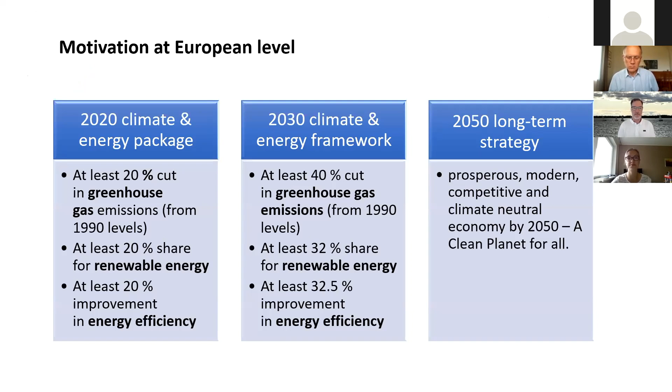The European Commission has set targets for the European Union to reduce greenhouse gas emissions, promote renewable energy sources, and increase energy efficiency. Lithuania has a national energy independence strategy where the desired results in the Lithuanian energy sector are stated. For example, one of them is to increase the share of electricity consumed from renewable energy sources compared to final electricity consumption to 30% by 2020, 45% by 2030, and 100% by 2050.

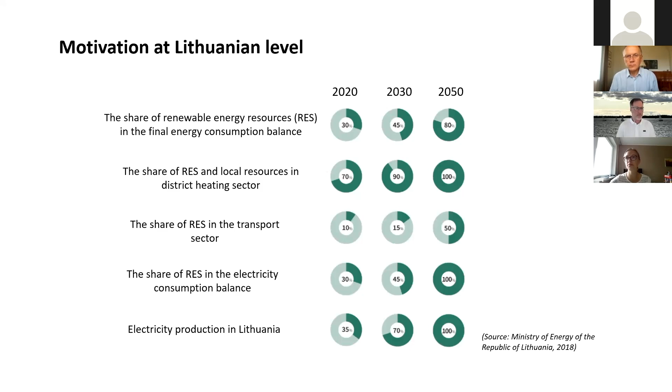Electrification of city transport and the use of renewable energy sources in the transport system have become leading trends for sustainable transportation. And passenger cars are one of the main contributors to climate change, air pollution and noise in the cities. My interests are measuring the impacts on the environment through a life cycle perspective. Therefore, for my analysis, I selected different engine passenger cars.

And here are the aims of the study. To evaluate and compare the environmental impacts and economic cost of battery electric vehicle, hybrid electric vehicle, and internal combustion engine vehicles powered with diesel and petrol, to analyze the electric cars' operation stage under different electricity generation scenarios that are forecasted for the years 2015-2050 in the Lithuanian context, and to assess the most environmentally and economically preferable electricity mix scenario and generation technologies under which the environmental load and economic cost would be the least.

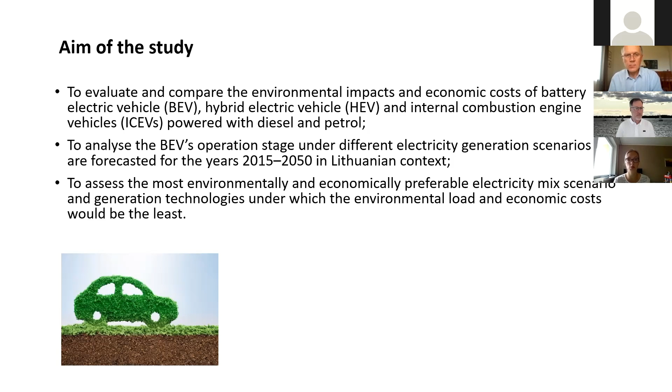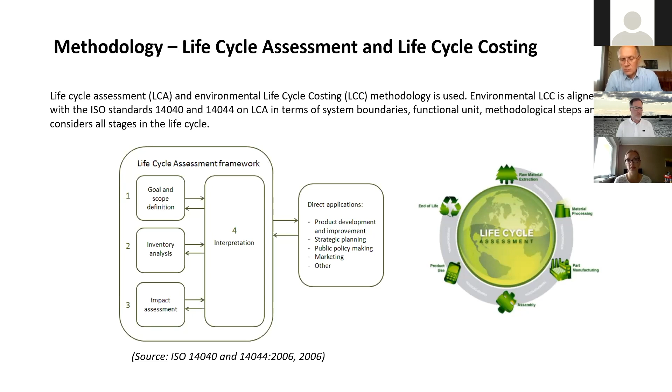Then methodology. Life cycle assessment and environmental life cycle costing methodologies were used. They are both aligned with the ISO standards on LCA in terms of system boundaries, functional unit, methodological steps, and consider all stages in the life cycle. In accordance with the standards, the analyses were performed in the following main steps: definition of the goal and scope of the study, identification of functional unit and system boundaries, life cycle inventory analysis, and life cycle impact assessment and interpretation.

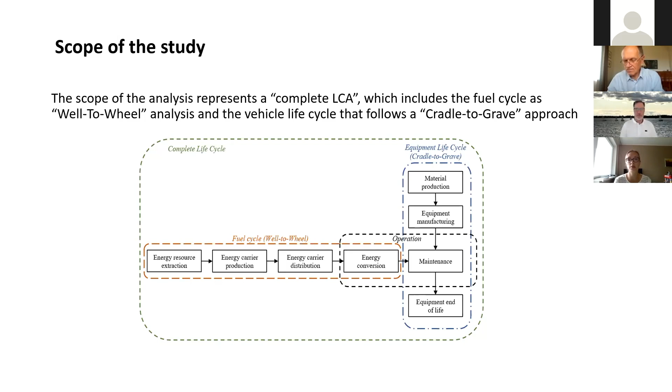Scope of the study. The scope of the analysis represents a complete life cycle assessment, which includes the fuel cycle as well-to-wheel analysis and the vehicle cycle that follows a cradle-to-grave approach. A fuel cycle combines stages from energy resource extraction until energy conversion, and the equipment life cycle combines stages from material production until equipment end of life.

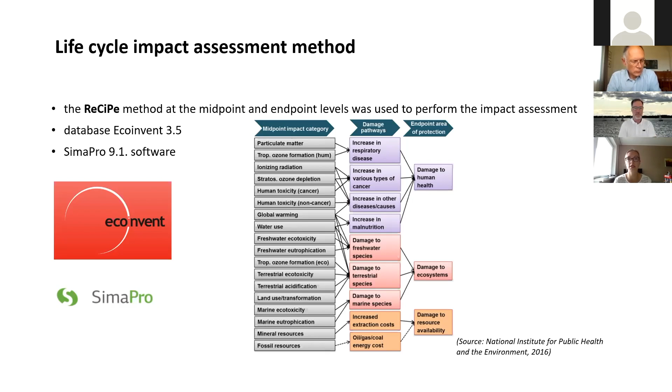Now I will present the life cycle impact assessment method. The ReCiPe method at the midpoint and endpoint levels was used to perform the impact assessment. For this analysis, the Ecoinvent 3.5 database and SimaPro 9.1 software were used. The ReCiPe method at the midpoint level shows the results in 18 impact categories, while the endpoint level combines these impact categories into 3 damage assessment areas: damage to human health, ecosystems, and resources.

Inventory analysis. This research aims to reveal the real situation in Lithuania, so the passenger car models have to match the most popular models registered in the market. According to the statistical data of Lithuania, the most popular electric car is the Nissan Leaf, hybrid electric car the Toyota Prius, and diesel and petrol cars are the Volkswagen Golf. These passenger car models belong to the medium-sized class and are similar in weight and length. Therefore, they are suitable for a comparative life cycle analysis.

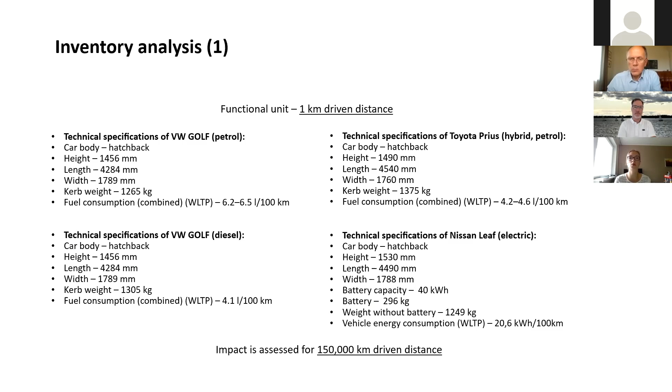A functional unit of 1 kilometer driving distance is determined and the impact is assessed for 150,000 kilometers driven distance. Environmental impacts are calculated for such a life cycle, ensuring that no electric car battery replacement is required. For the battery electric car, it is very important to know how electricity for charging the battery is produced. For this reason, the impact of the battery electric car is calculated under different electricity mixes and electricity production technologies.

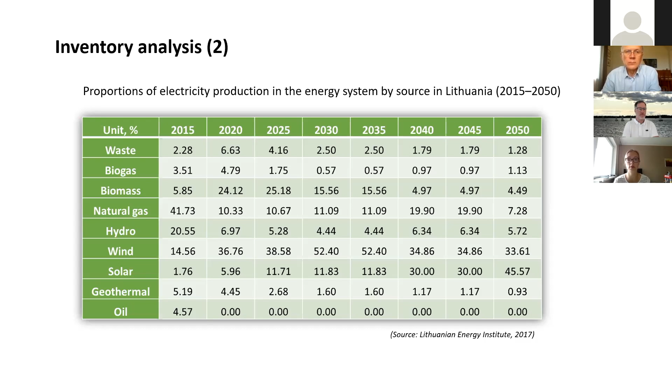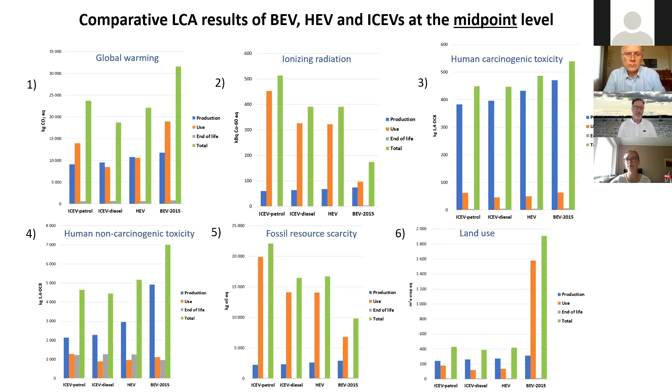This graph shows the results of well-to-wheel analysis of the same passenger cars at the midpoint level. Impact on the environment for the battery electric car depends on electricity production mix. Therefore, here I present well-to-wheel analysis showing the impact from energy resource extraction until operation under different electricity production scenarios.

For example, in the year of 2015, due to the use of oil and the biggest share of natural gas, this electricity mix was the most polluting. Year of 2030 is expected to be one of the most environmentally friendly, as 4 of 6 impact categories here are the least due to the use of biomass and wind energy as main sources. Moreover, solar and wind energy will be actively used as the main sources in the scenario of 2050. Therefore, this scenario is one of the desirable, as in all impact categories it is among the lowest.

Results of global warming show that battery electric car with electricity mix of 2050 is about 60% less than a petrol car and 25% less than diesel car.

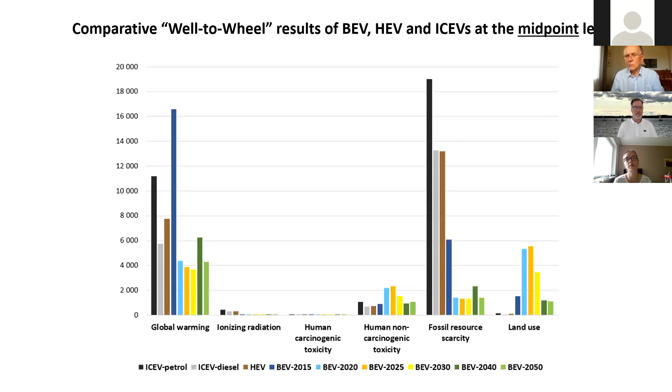The environmental life cycle assessment was also performed according to the ReCiPe method at the endpoint level. The results summarize the total environmental load as damage for resources, ecosystems, and human health. The results reveal that a petrol car has the highest environmental damage. Hybrid and electric car with electricity mix of 2015 have almost the same environmental damage, which is 14% less than petrol car. Next comes diesel car with 10% less impact than hybrid and battery electric cars. Furthermore, battery electric car with electricity mix scenarios from 2020 to 2050, which are composed mainly of renewable energy sources, have the least environmental damage.

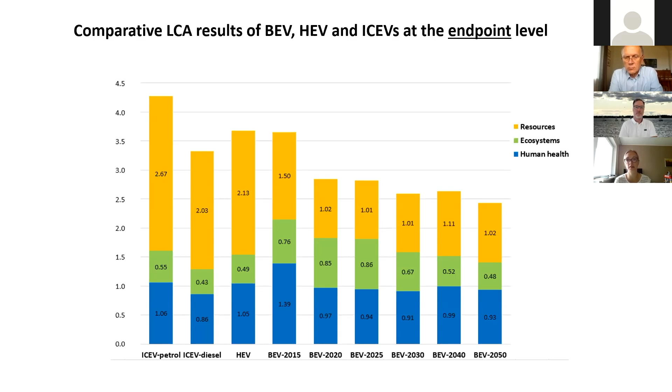Now I'd like to present the results of life cycle costing in order to assess the economic side throughout the whole life cycle: manufacturing, use, and end-of-life stages. The graph shows the results of a comparative life cycle cost analysis of the same passenger cars from consumer side under Lithuanian conditions. Manufacturing phase includes acquisition and registration tax. Operation phase includes maintenance and fuel price. End-of-life phase includes only the deregistration tax. A service of old cars, discard for treatment and recovery is free of charge, therefore it is eliminated.

The results show that hybrid and battery electric cars have the highest cost because of the high purchase prices, while internal combustion vehicles have the lowest ones. But comparing the operation stage, it is obvious that electric car has about 37% less cost than diesel car and 60% less than petrol car. It is assumed that electric car is charged at home at an average cost of electricity. But operation for the electric car owners can be even less because most of public charging stations are free of charge.

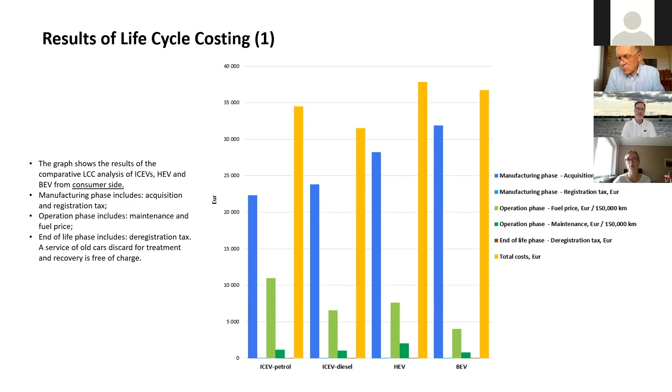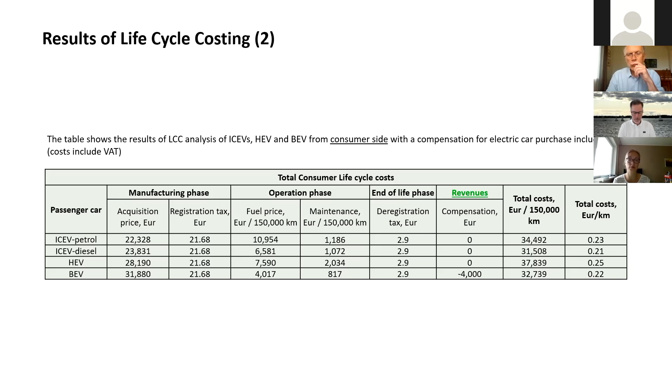This year, a financial incentive has been implemented in order to promote the purchase of electric passenger cars. There is a possibility to receive a compensation of 2,000 euros to purchase a used electric car and 4,000 euros for the purchase of a new electric car. Therefore, I want to present the same results in the table, but with a compensation included. In comparing the total cost, here we see that electric and diesel cars are the most competitive ones. There, the total consumer life cycle costs are about 5 to 13% less than others.

Then I will present another diagram which will show the results from not only consumer side but manufacturer side. It's very important to look through life cycle costing not only from consumers but also from manufacturer side. So this analysis combines manufacturing phase, which includes passenger car and batteries production, operation phase, with fuel production and distribution, road and car maintenance, and end-of-life phase with treatment of glider, powertrain, internal combustion engine, and batteries.

The values we obtained using OpenLCA software and the Ecoinvent database. But the database is provided for the year of 2005. Accordingly, due to the data limitations, the results may differ from the present times. Nevertheless, I wanted to highlight that these results are similar to the graph before in the way that electric car has the highest cost in production stage and the least cost in operation stage.